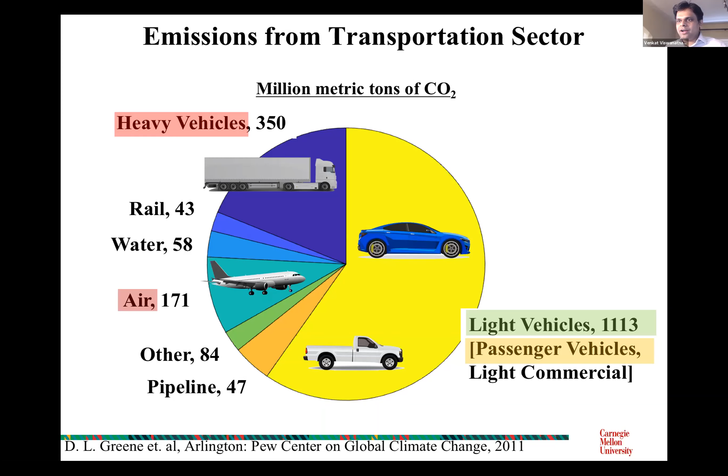Now, while the success of Harbour Air and other smaller planes are significant, if you look at the fuel consumption — and we'll hear more about these kinds of things from our panelists — the important pie to attack is single aisle and twin aisle. So those would be the kind of aircraft that you would fly for distances on the order of a few thousand kilometers.

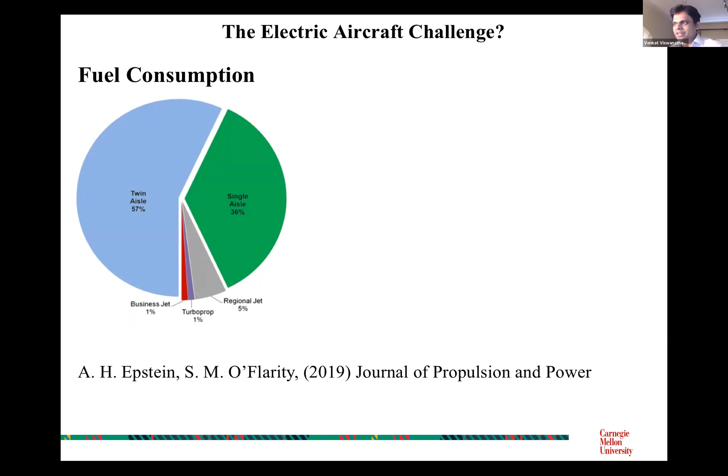Now, if you ask the question, what would it take to electrify something like a single aisle aircraft with whatever is your energy source — batteries or other kinds of electrical power sources such as fuel cells — you can analyze that as a function of the aircraft range, and you see something quite interesting. This is borrowed from a paper by Alan Epstein.

And what you see is, depending on the kind of specific power you can deliver out of your battery packs or other kinds of power sources, what's marked here is the needed specific energy or energy density — how much energy you can store per weight of your power source — versus the aircraft range. And what you see is numbers on the order of a few thousand, right? Maybe somewhere between 1 and 5,000, and you can compare that to the state of the art.

This would be TRL-9, so these would be the kind of batteries that would power your electric cars. They're not even on the chart, right? And so that's an important message, right? That the kind of energy sources we have are not adequate to address one approach, at least the direct approach of electrifying aviation directly through batteries or other kinds of electrical power sources.

Fuel cells also suffer from the fact that they may be able to meet the energy density requirement, but the specific power remains challenging, right? The best state-of-the-art fuel cells in the Toyota Mirai still are well below this 3 kilowatt per kilogram mark. So there's a specific power challenge. Now, this is on the sort of old aviation market, I would say.

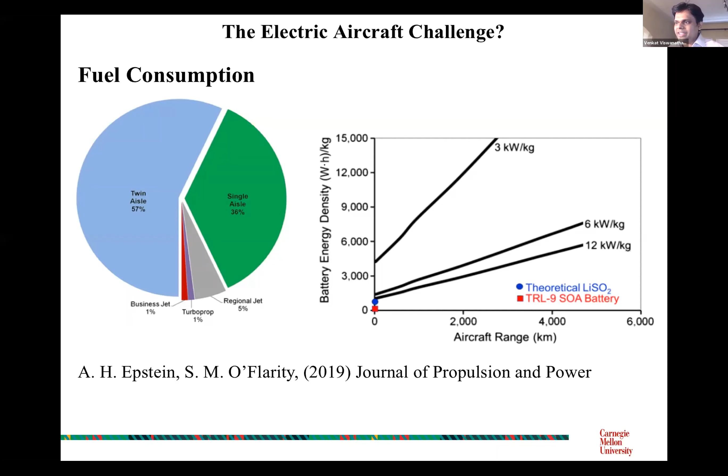And if you look ahead, right, this is an artist rendering from an Uber Elevate Summit where they show a concept around urban air mobility. And these are so-called skyports, which would essentially have these kinds of vertical takeoff and landing aircraft that would come in and take you probably from the top of your building to where you would want to go, right? So the promise is that I could go from the top of my house in Pittsburgh to the Pittsburgh airport in like 10 minutes.

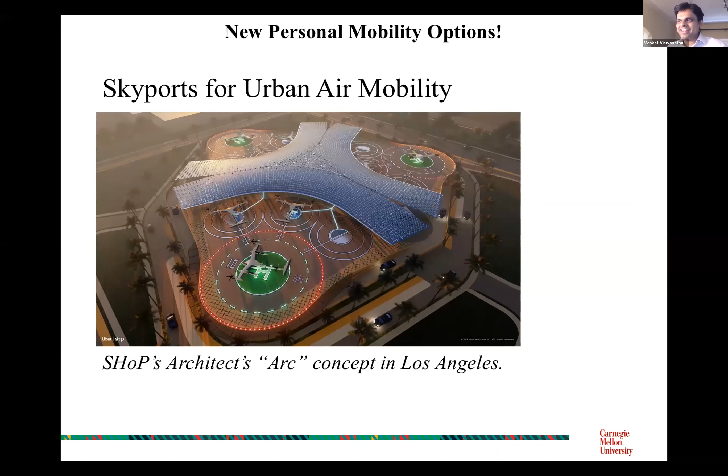And so it's very exciting, and depending on who you ask, there are at least 170 electric aviation concepts in this vertical takeoff and landing space. And the Vertical Flight Society pegs this at $1 billion of investment. And I think it's important, and we'll hear from some of the panelists who are working on this, on whether this hype is worth it or not, or what's the reality.

So I'm very excited now to turn this over to our panelists and get their perspectives. We have a very exciting group of panelists from a broad range of experience from government, academia, and industry. And so I'm very excited first to turn over to Rodger Dyson, and hopefully you can share the screen as I introduce you. I will do that. Can you hear me? Yep. Okay, excellent. So Rodger is at NASA Glenn Research, and he's been there for over 30 years, and he currently serves as the hybrid gas electric propulsion technical lead. And he's going to tell us first a little bit about the challenges around electrifying aviation.

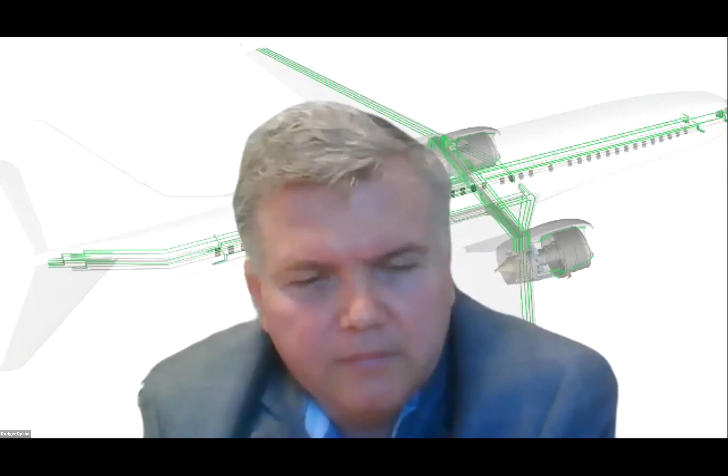All right. Can you see that? Oops. All right. Can you see the screen? Not yet. Not yet. All right, there we go. Got it? Okay, excellent. Let me make that bigger. Sorry for the technical things. One of the interesting things about all these remote tools, we're probably using like 4 or 5 new tools that we normally don't use in our normal work days. So sorry about that. All right, well, thank you very much.

I guess we're gonna do this in 2 sections. So I'll give an introduction to the areas of electric propulsion as it relates to decarbonizing aviation. NASA's focus is actually tackling electric propulsion at these larger aircraft sizes, as you had mentioned earlier, because that's the largest user of fuel. Overall, I don't think the previous slide showed this, but about 3% of the CO2 produced is from the aviation industry currently. So yeah, we're working actually the on-demand mobility market.

There's a group that's working that. We have a group that's working the regional market, and then we have the single aisle as well. The single aisle work we've been doing for maybe 10 years or longer now, working our way up at least since 2008, some SUGAR studies as they're called. But the idea at the single aisle level is that's where you can have the highest impact on the fuel burn and therefore emission reductions.

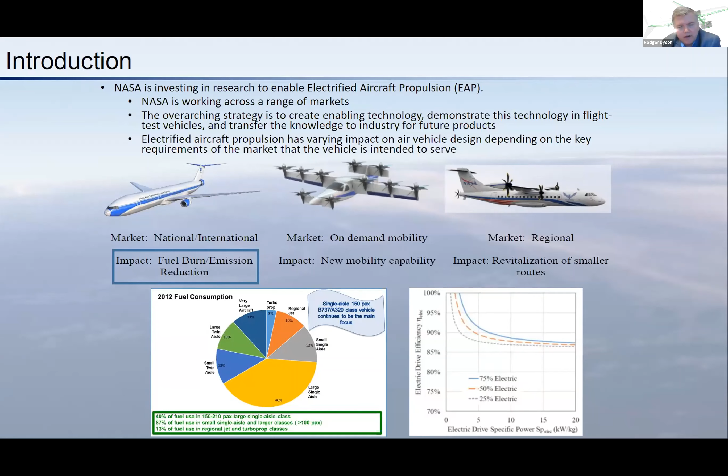And when you look at the schedule for this, and when we're planning out what we're going to do over the next 20 or 30 years, we want to invest appropriately at the different levels. So the way it's going to work out, we believe, is urban air mobility, the smaller aircraft. NASA has the X-57 aircraft that's going to be flying soon. That's going to give you a base of technology that you can certify, get some endurance tests done with it, confirm it operates at altitude, things like that.

And then we're planning maybe by the 2035 range that you'd have single aisle aircraft which use the megawatt scale technology, and estimates are anywhere from 5 to 10% fuel savings. And then beyond that, a radical redesign of the aircraft to support liquid hydrogen, for example, with a cryogenic aircraft.

And then just real quickly, there's 100 years of electric aircraft work actually, but same thing with the automobile market. If you go to the Henry Ford Museum in Michigan, you can see the same phenomenon that happened. Electric's great, but you need all the other technologies to support it, the energy storage, the efficiency, the mass, and so forth. So there was a good 100 years there where not a whole lot happened. And then since the year 2000 and on, there's been a lot of interest, predominantly because the power electronics technology has so radically improved, and we can now consider doing some of these things.

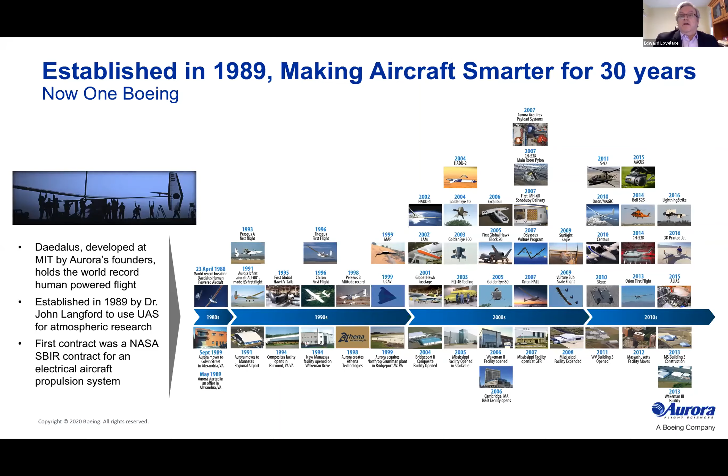So just talking again about the future markets that are part of this panel, which is looking at decarbonized solutions. Here you're looking at the Boeing Next portfolio. Boeing Next was created by Boeing in order to develop some of these future disruptive mobility markets and look at new ways of moving through the air. And you can see a portfolio of platforms that we are in development and study on. The key underpinning element is that all of these developments are centered around safe and sustainable future mobility solutions.

And that goes from the small data and insight type of platforms to cargo platforms to passenger platforms. To be clear, this also spans a full range of target segments, from the short-range urban applications to regional and eventually to global applications. What you'll see in the second half when I go through some more of the challenges, I'm going to focus primarily on the urban air mobility, so the short-range metro city type of applications.

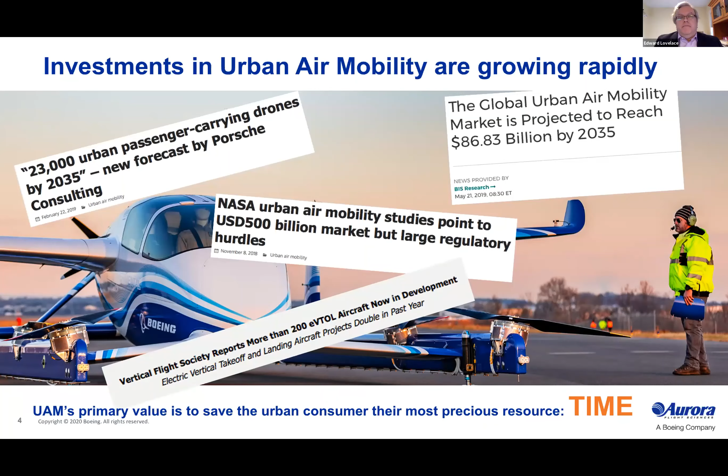So it was mentioned briefly that urban air mobility is a rapidly growing area, and for sure, there's an accelerating amount of activity in terms of startups that are involved in this area, as well as investments being made. And you're seeing a wide range of projections on eventually how large this market might get, into the hundreds of billions. But in addition to the basic needs for urban air mobility to be safe and clean, the other underpinning item that is needed for this to take off is it needs to save a consumer time. That's the main value that it has in this type of urban setting.

Being able to connect new locations that haven't previously been served by traditional air transport, and doing it at a rate that saves them time. So as large urban centers grow over the coming decades, today you're already in some centers spending more than 90 minutes moving from home to where your location is going to be for the day. That's only going to get worse. And so urban air mobility is an opportunity to be part of a multimodal system that'll save people time. So I'll stop here at this point, and then we'll go into some of the challenges in the second half.

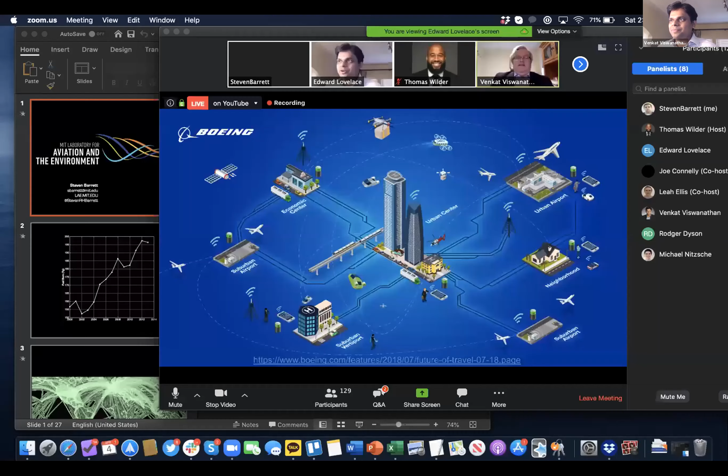So I'll just start by noting that aviation is the fastest growing mode of transportation. So even before we start thinking about urban air mobility and other services in the future, already this is a massively growing industry, obviously putting aside the current issues the world faces right now. And to give you a sense of that, I'll show you a chart of data made at MIT, which shows fuel burn from civil aviation for the first 15 years of this century. And you can see here the tremendous rate of growth, which is at some 4 to 5% per year.

Now, for comparison, the average efficiency improvements for commercial aviation is around 1 or 2% per year. So that tells you that the growth in aviation is far outstripping by a factor of several the increase in efficiency. Now, in terms of where those emissions occur, they currently occur mostly over the US and over Europe. But that's not necessarily where a lot of the growth in the world will be going forwards.

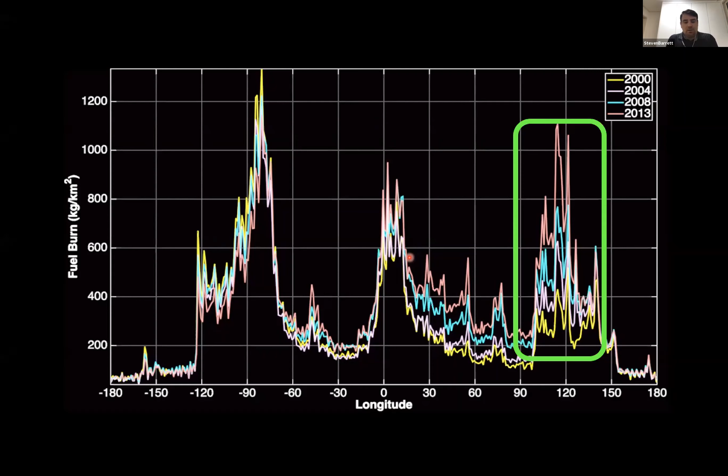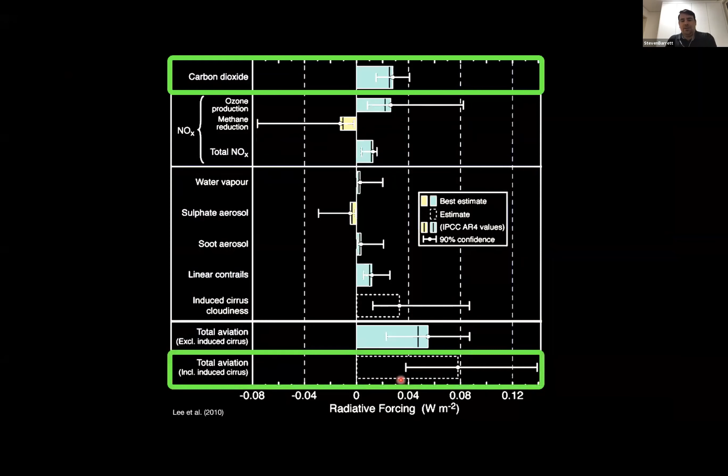Now, what I'll show you next is a chart that shows the warming or radiative forcing from aviation caused by the different emissions from the sector. This is the chart here. Radiative forcing at the bottom here is the measure of warming, and at the top there's carbon dioxide. Now, carbon dioxide gives you a certain amount of warming that is about 3% of warming for the whole world today. But if you look at the total here, you can see that that total is about double CO2 alone.

In other words, there's a whole range of effects unique to aviation that occur because the emissions happen high up in the atmosphere that mean that aviation has roughly a factor of 2 uplift on the climate impact compared to the equivalent emissions at ground level.

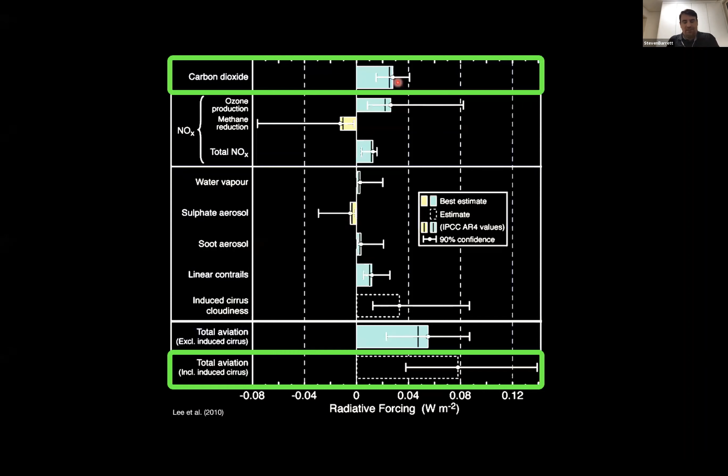So all these factors mean that aviation faces a real challenge because it's very difficult to come up with an energy substitute for jet fuel. And then you've got this multiplier and you've got tremendous growth. And once you build an airplane that lasts for 30 years, and building and certifying airplanes takes a very long time. So all of these things mean we're really facing a huge challenge as an industry here.

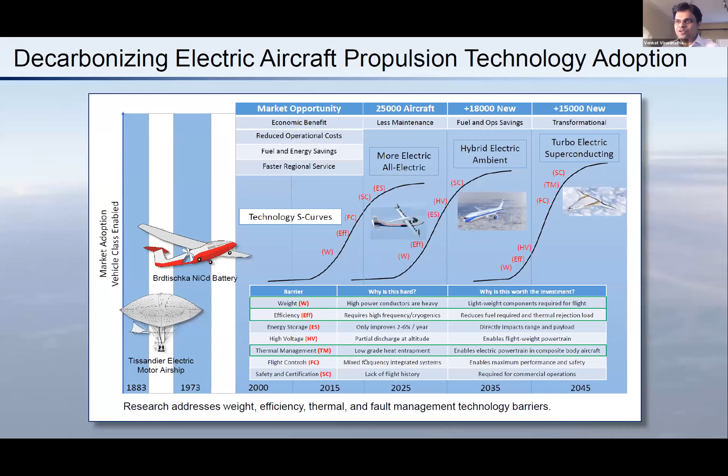Thanks a lot, Steven, for setting the context. So I want to go back to Rodger and ask him to take us through the many challenges that face electric aviation, and I think we can view all the challenges as opportunities for things that we should all be thinking about and working on. So Rodger, on to you for taking us through the challenges.

Well, thank you. I'm actually already learning interesting things from the panel myself, so hopefully everyone else is too.

So now I'm going to talk about how we're tackling, in particular, the megawatt scale type technologies that are required if we're going to replace or reduce the fuel that's used on the single aisle aircraft. And as indicated earlier, the bulk of the fuel that is used in aviation today is used by those size vehicles. But what we're finding is that it's an integration challenge.

While you're transitioning from one technology to the next technology, and you have to do it in a safe way, that means you typically keep the legacy equipment on board while you're adding new equipment at the same time as backups and things like this. So there's a transition period where it actually is more challenging, and then eventually you can rely on your advanced technologies completely. But it boils down to there's a power, propulsion, thermal, and airframe integration challenge.

And they're all interrelated. Today single-aisle aircraft have been optimized over many decades because they're so widely used. So to improve them further is a real challenge. It's not an easy win. You might benefit one part of the system, but it costs you someplace else. And when you're talking about maybe net benefits of 5 to 10%, with all of these systems playing nicely together, it's easy to not see that net benefit if all of your technology doesn't perform as you're hoping.

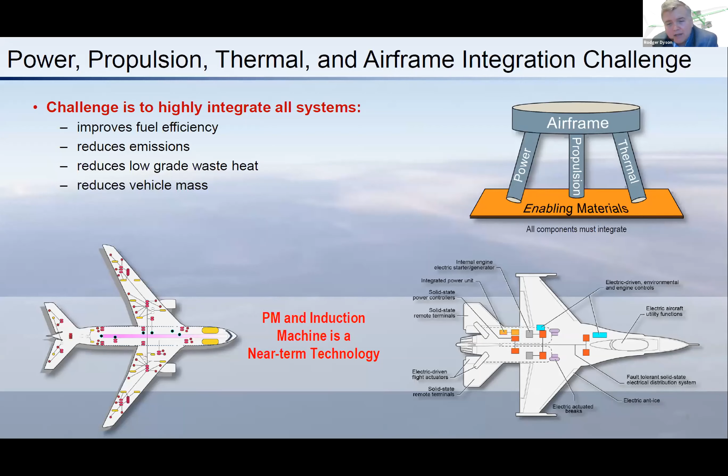There's going to be a number of flight demonstrations you're going to be hearing about. I don't think all the companies have announced them yet, but in terms of motor technology, people are using permanent magnet machines, a near-term technology most are using for flight because it's lightweight. I have the airframe mnemonic on the side there showing that power, propulsion, and thermal all integrate together at the airframe.

So talking about integrating the electric motors, there's a couple of ways to do it. Industry right now, I'm talking about the large 150 passenger scale aircraft, single aisle, is going towards parallel hybrid, because that involves the least change to the airframe. Change is not your friend when it comes to these large aircraft and getting them certified. One crash and it changes your whole perspective. So they're very conservative, and by embedding electric machines with the turbofan, you can get 3 to 5% emission and fuel savings, which maybe doesn't sound like a lot, but because usage rates are so huge and these systems are already so optimized, getting 3 or 5% is worth a lot - billions of dollars and many gallons of fuel saved.

So there's two ways to do it. Parallel hybrid, which is short term, you'll be hearing more about that - that's where you put an electric motor on the same shaft that's spinning a fan, and you still have jet fuel powering it, but you can reduce the size of the engine, with other benefits too. Then longer term, once we're comfortable with decarbonizing aviation at this scale with these changes that the customer won't even see, we believe turbo-electric type technologies, where you can make slight changes to the airframe like boundary layer ingestion, can boost you another 5 or 10% in fuel savings. So these are the two areas we're working in, combining electric machines with current technology.

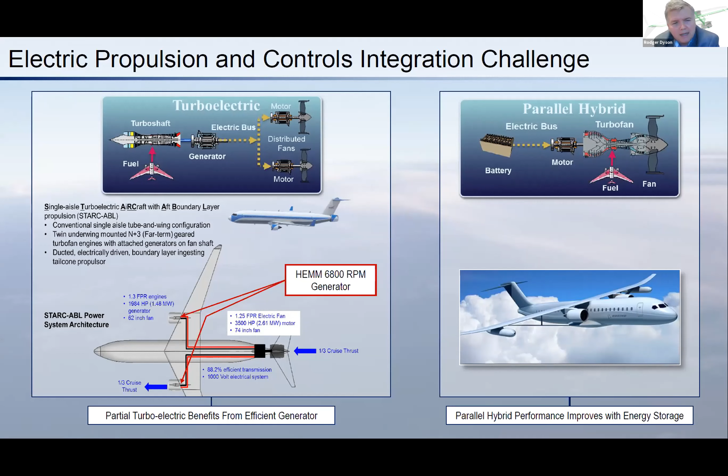The other new area, safety and certification, is a really big deal, especially when we start talking about a whole new set of technologies operating at voltages. Today aircraft are designed for 270 volts and below because of Paschen's curve. Now we're talking about 1,000 volts and higher to make them lightweight enough. It turns out that if you use all that power at high voltage at altitude, it's like an arc welder - in a millisecond you could arc weld through the frame of the aircraft if you're not careful. Today's technology can respond to a fault in about 500 microseconds to 1 millisecond, enough to protect the airframe and people, but not the equipment. The equipment, like all these IGBTs flying at altitude, can only be run at saturation for about 10 microseconds. So that's what we're doing next: developing a new class of fault management hardware that can respond much quicker than today, at those higher voltages and currents.

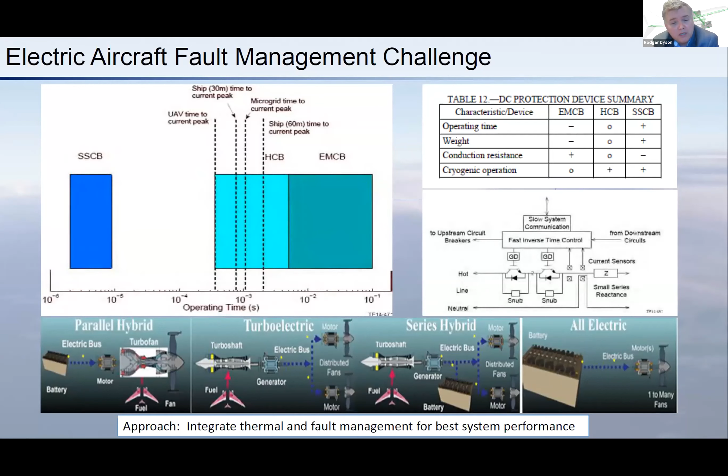Thermal management is another challenge I alluded to earlier. People are looking at what to do with all this heat being generated on the aircraft now. Maybe your aircraft is more fuel efficient, but now you have more distributed heat sources located throughout the aircraft. It used to be we would just dump all the heat either with ram air or out the end of the nozzle of the turbofan - that's where your heat went. But now we have a lot more heat, and low temperature heat is the worst kind because it's very difficult to get rid of.

So where do you dump it? Fuel on these aircraft are limited to about 50 kilowatts. If you dump it out to the skin, which requires changing the aircraft design, you're limited to about 300 kilowatts.

If you use ram air, which they do now on the Boeing 737, for example, or bypass air, which is the propulsive air from the turbofan, then you have drag penalties. In particular, we have to design for worst case, so like a 1% hot day. You have a 3 to 5% drag penalty trying to manage the heat. So you might develop all these other technologies, and then you find out, okay, now we have to manage the heat. Well, we just lost the benefit that we got from putting all these really slick new technologies on the aircraft. So that's what I mean.

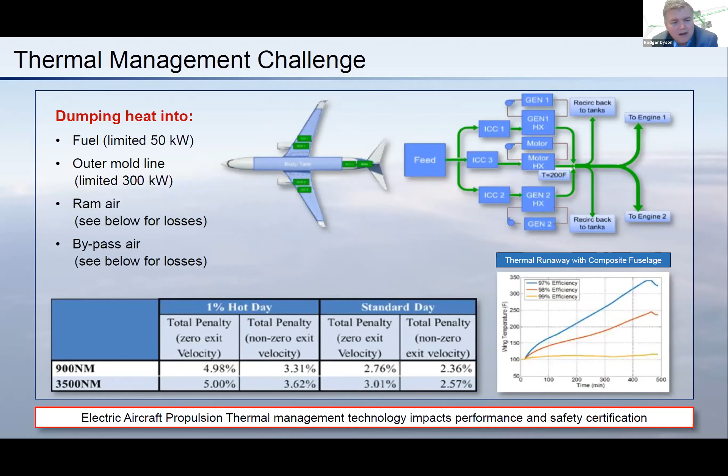It's a systems problem. Energy storage, some other speakers might talk more about this. It's just not an option for single aisle aircraft to have it all electric aircraft. The battery size would be bigger than the aircraft itself, even with the next 10, 20 years of technology improvement.

In fact, we're assuming you need about 500 watt hours per kilogram specific energy density for batteries, just for the parallel hybrid to really close in a good way. And we're banking on that as well. So these hybrid solutions are really a compromise because we don't have the battery technology where we want it to be.

So when we use that word hybrid, what does that mean? That means we're keeping really all of our other technology, and we're adding new technology onto the vehicle as a compromise, which makes for very complex systems, more complex than they are today. So again, it's not easy to get fuel savings on these large aircraft, and we're making the problem more complicated because of all the new technologies. Eventually, it should all get simplified again, but that's where we're at today.

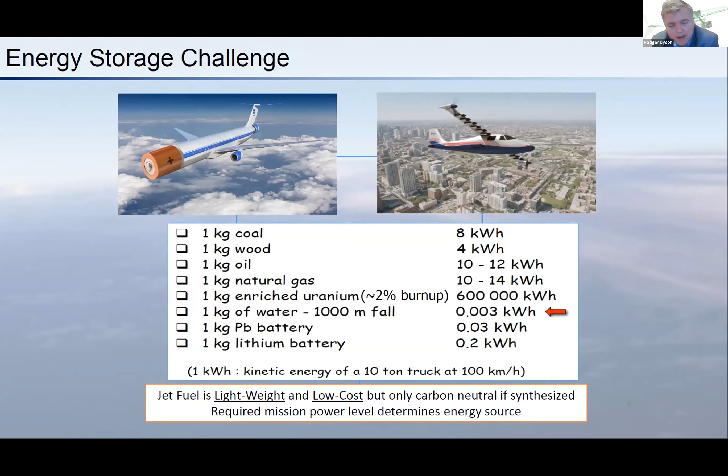Oh, and I should just mention that jet fuel is 40 times, 50 times lighter than a battery for the same energy storage. But Department of Energy, ARPA-E, are looking at synthetic fuels, carbon neutral fuels. So that might be another path. And I think one of the other panelists might talk more about that.

And then I talked about materials kind of being a technology that can elevate everything else up. And so we are working superconducting materials. Main challenge there, and keep in mind, we're trying to make things very efficient and very lightweight because we're adding additional, it's just like adding additional cargo to the aircraft. Ideally, we'd have 100% efficiency and no additional weight. That's what you'd like to see, but that's not the case.

So we're adding technologies, and we want to minimize the efficiency impact and minimize the mass impact, which on its own would actually make the vehicle less efficient and make it weigh more. But the reason for electric aircraft and what it buys you are other approaches that you can get. It's usually airframe related improvements, or you're improving the engine efficiency by increasing the bypass ratio. I know I'm throwing a lot of concepts all at once, but the superconducting materials allows you to make electric machines and distribution systems that are much lighter potentially.

But the problem is that AC is not managed well. So DC current's fine, but AC is not. So that's one area we're working, is how do you make AC still be close to superconducting performance.

Insulation materials, we have all this new heat sources. Normally insulation materials also hold in heat. Well, we need insulation that can handle high voltage and conduct heat at the same time. Magnetic materials. It turns out that if you're going to be building filters and other electrical parts and pieces, you like to go to higher frequencies because that reduces the mass. Typically, you end up with hysteresis losses and other losses that reduces the efficiency. So we're developing new materials that can handle higher frequencies.

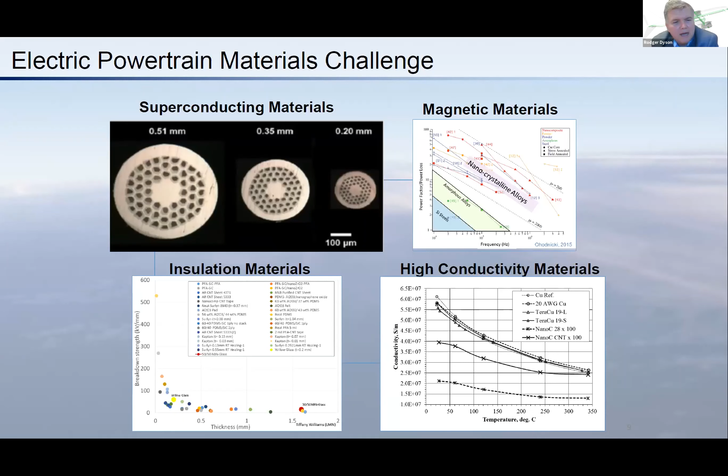And then also just, not even at superconducting, but just ambient temperature conductivity of materials. The higher conductivity we can get, the lower the mass can be. And then, so you have all of these different technologies, and at the megawatt scale, testing them is a challenge. So we put together an electric aircraft test bed back in 2015, and it's actually been helping industry quite a bit at this point, because we need to test at megawatt scales and all of the system interactions.

So for example, I give a list down there, and all of this has to be tested at altitude, so 35,000 feet, because different things happen at altitude. So for example, voltage, as you go higher up in altitude, you tend to get partial discharge.

Thermal management systems are affected because you have thinner air, the heat transfer coefficient changes, and so forth. Everything has an altitude-related response, so you want to test it at altitude. But you also want to test high voltage bus architectures, high power megawatt motors and inverters. You also want to be sure that your communication systems can still work properly, because now we have all these high power systems next to your communication systems. You still want to try to meet the standards that are out there, the DO-160G and other standards.

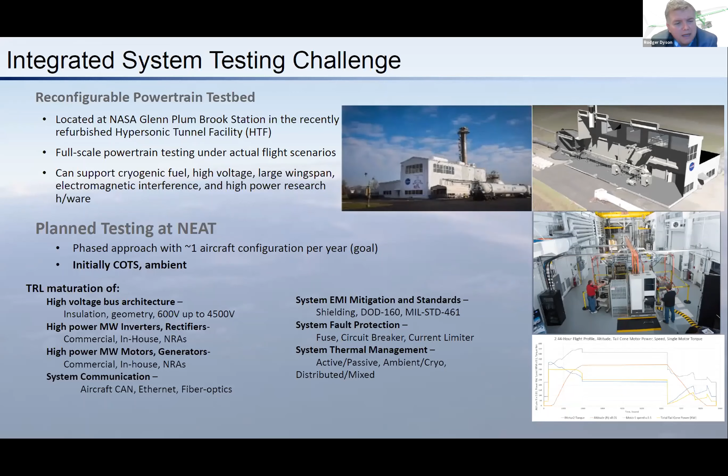And I mentioned earlier the fault protection. We need faster fault protection, and then system thermal management. So we have an altitude chamber that's about 25 feet in diameter and 20 feet high, megawatt scale, and can handle a megawatt worth of heat.

So just in conclusion, and in the panel discussions I can answer more details on any of these things. But I guess the bottom line is that where we're at today in terms of megawatt scale technologies for single aisle aircraft, we've confirmed that motors and inverters at the megawatt scale can be light enough, can operate at those higher voltages, and the only thing left is confirming their durability. There's very little public information out there about it, because it's a competitive market right now. But we think those are actually addressed, and you're going to be hearing more about those.

The new area that needs development that we're working on right now is the system level technologies for those things—propulsion controls, faster fault management, and integrated thermal management. And again, doing it without adding too much more weight or complexity to the system, and still finding a path to be able to certify all of these technologies. There's multiple government agencies collaborating in all these areas.

But again, the bottom line is large transport aircraft has the biggest impact on CO2 production, so this is where we're tackling it, and it has the highest impact on decarbonization. In addition, there's new mission capability that's possible because of it. Like, for example, taxiing on the ground at airports could be done electrically, and it'd be quieter, and there's other benefits as well. So it's a system thing, but it's also easy to have one part of the system disproportionately affect another part in a way you didn't expect.

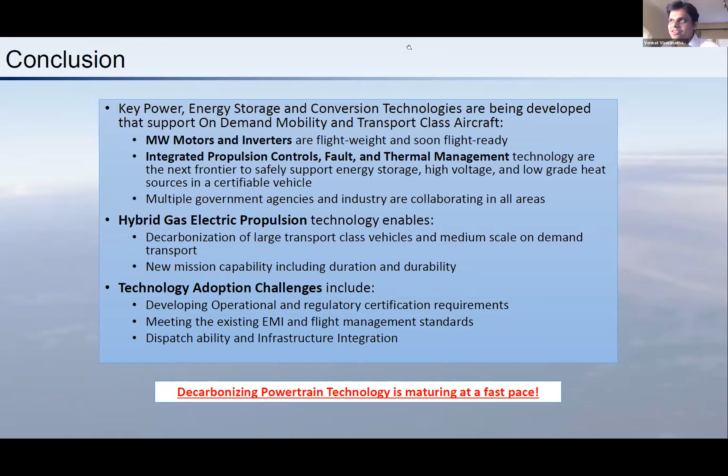Next, I'll transition over back to Stephen, who's going to tell us a little bit about alternate fuels and then another exciting strategy for electric propulsion, which is a little different from what we've been hearing.

Thanks. Yeah, so I thought I'd start by giving a high-level view on what the mitigation approaches are to address aviation, not only CO2, but also the non-CO2 effects I mentioned that gives you roughly a factor of 2. Then I'll move to some of the challenges unique to some of the future applications of drones and urban air mobility. So at least for commercial aviation, mitigation approaches include operational, which means flying planes more efficiently so they burn less fuel. That's something we've got to do, but it might only give you something like 10%, so it's important but not really going to get you to something close to net zero.

Secondly, fuels. So you don't have to just use petroleum-derived kerosene or Jet A or Jet A1 fuel. There are other options.

Third, technology, which is what most of this discussion will be about. And also fourth, economics. So there are approaches where you could price carbon into the aviation system and internalize the environmental impacts that way.

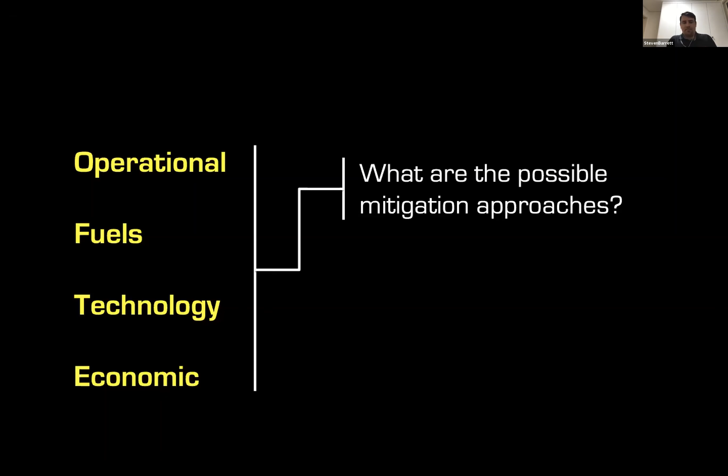But first of all, I want to focus on fuels, and in particular biofuels. The idea behind a biofuel is to use biomass, a crop or plant or tree, to make jet fuel. When you grow biomass through photosynthesis, carbon dioxide is taken out of the atmosphere, and the biomass created is physically carbon and oxygen and other components where the carbon came from the atmosphere. Then you convert that biomass into a fuel with chemical engineering techniques, then burn it, and the carbon atoms in that fuel came from the atmosphere in the recent past.

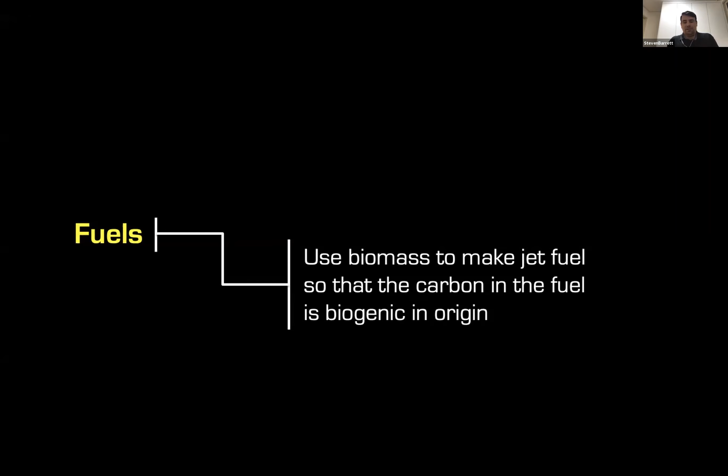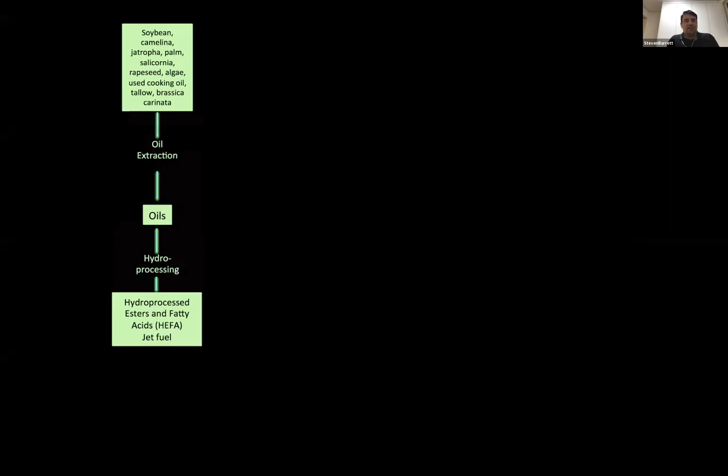So the idea is that the life cycle carbon dioxide emissions of a biofuel are significantly lower than a conventional fuel. There are many ways to do this. You can have a whole range of different feedstock crops, shown in the top left, like soybean, camelina, or jatropha. Then there are techniques such as producing HEFA fuels by mechanical and then chemical engineering approaches, and a whole raft of different feedstocks that can be used to create fuels using techniques including fermentation and Fischer-Tropsch.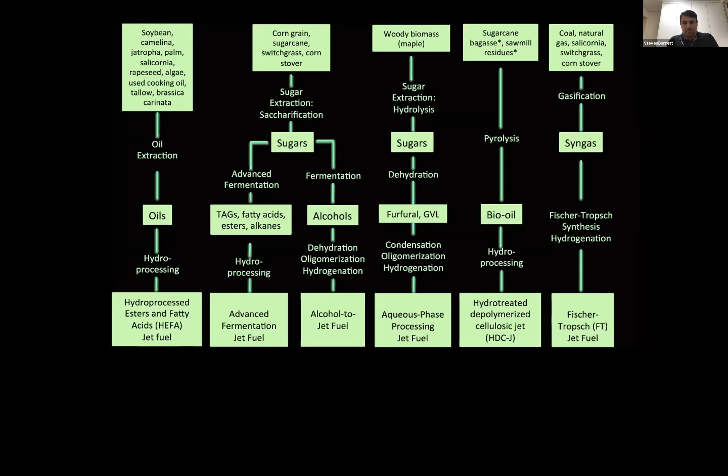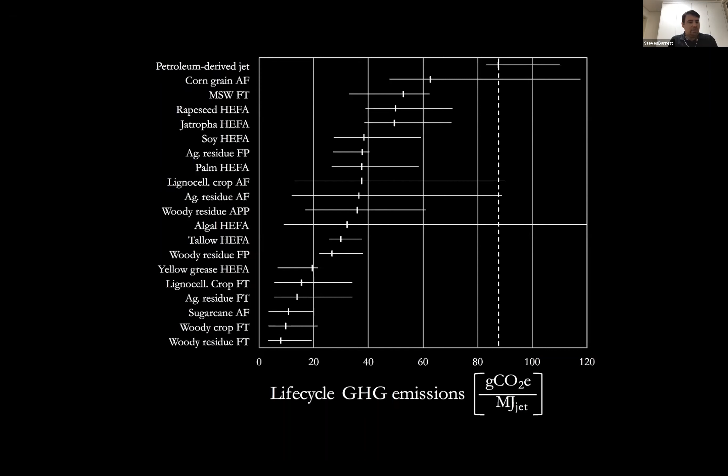So this tells you biofuels really are a viable way to reduce CO2 from aviation, but there are some downsides, including that they cost twice or sometimes several times more than conventional fuels, and can in some cases compete for land with food crops and raise other land use change issues. But they're potentially an important part of the mix as we seek to solve this problem.

So let's go on to technology. On the technology front, there are a number of approaches; I'll highlight a couple here. The most common approach is to think about decreasing the fuel burn of the vehicle, which is probably the most important single thing to do. That's really about creating a vehicle that uses less energy.

Beyond conventional fuel, or even a biofuel that's chemically very close to conventional fuel, you could go for a very different kind of energy carrier, for example a cryogenic fuel like liquefied natural gas or hydrogen. Those have benefits and disadvantages we can discuss in the panel session afterwards. And of course, fully battery electric aircraft could be a solution, particularly for very short haul and urban air mobility, where they look more viable based on where we see battery technology going.

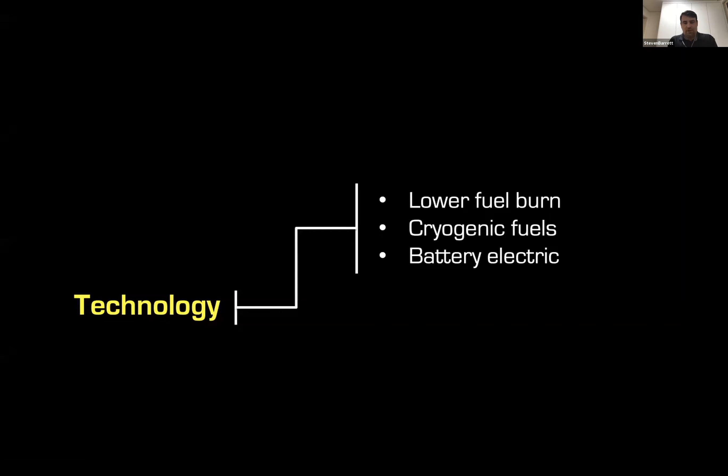But on lower fuel burn, colleagues in MIT's Aeronautics and Astronautics Department, in collaboration with Pratt & Whitney and Aurora, a few years ago designed this aircraft called the D8, or double bubble. In the more extreme technological assumption scenarios for this aircraft, it could yield up to a 70% reduction in fuel burn using approaches including boundary layer ingestion. That really does move the needle toward net climate neutral. If you had an aircraft like this combined with biofuels, those two things together could really get you a long way toward a climate neutral aviation sector.

But what I thought I might change to now is to look at a different application from commercial aviation and think about drones.

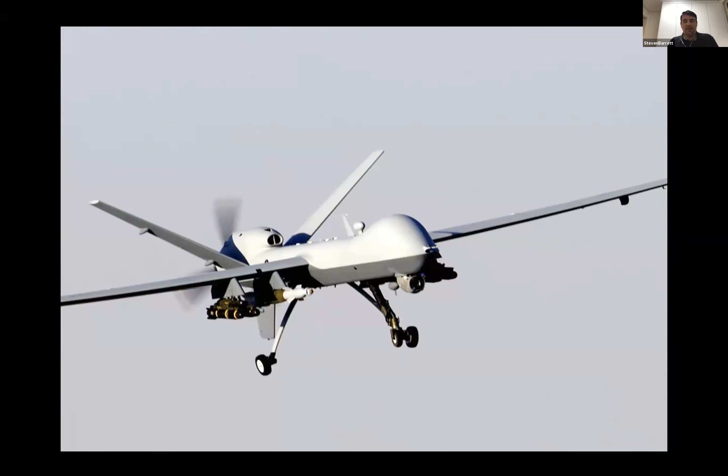Now, drones, which are kind of similar in size and range in some ways to urban air mobility, have been around for a long time. This is an example of a military aircraft that's been flying for some 20 years. There are also other applications more recently, like this blood delivery drone used in Africa at the moment, and perhaps in the future things like Amazon Prime Air and urban air mobility at a slightly larger scale.

Now, while at a global scale we worry a lot about carbon dioxide and energy use, when we get to the more local scale, we have pollution emissions that we're concerned about, energy use still, but also noise. So in order to enable local scale aviation, meaning both package delivery and other services, as well as potentially air mobility, we need to solve those challenges. Now, all of these things have rotating propellers that create a lot of noise.

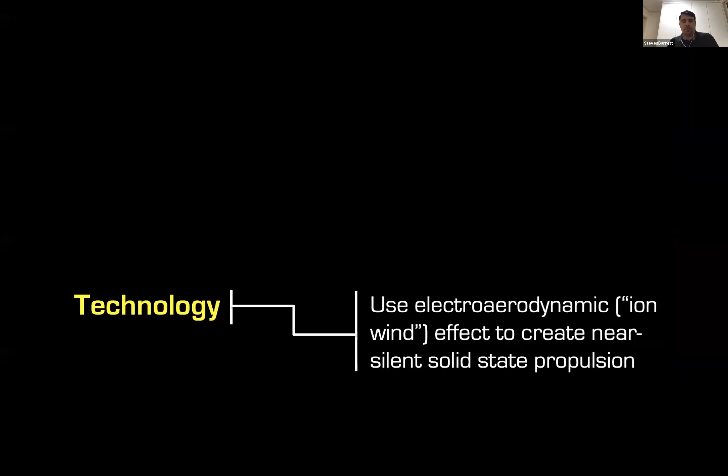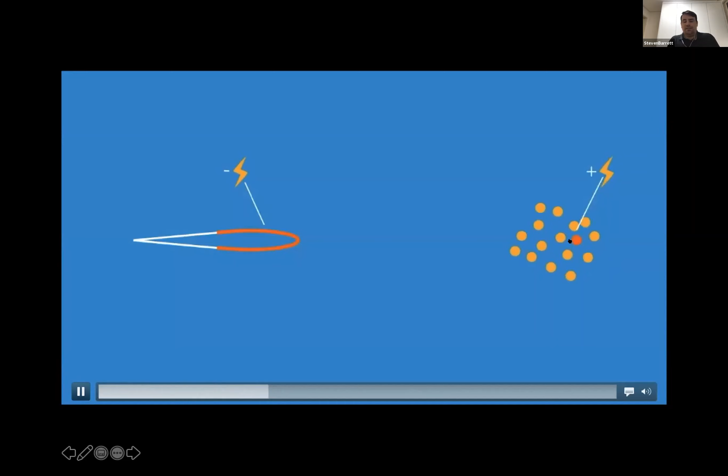When you charge that, it ionizes nitrogen molecules around the high voltage electrode, and then there's an electric field going from the high voltage to the low voltage that attracts the ions towards the low voltage. Those collide with neutral air molecules, transferring momentum to them, creating a wind or an ionic wind in the air, and that's the mechanism for producing a propulsive force.

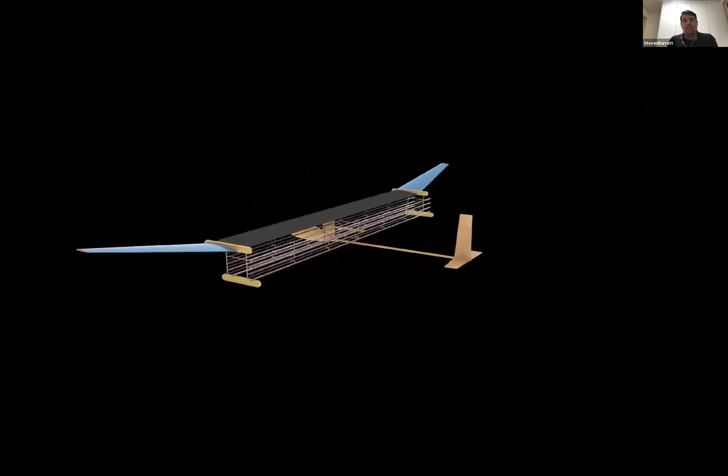So over the last about 9 years, we've done a series of experiments at MIT to build up the scientific knowledge base on how these kinds of ionic winds, as they're called, are generated and how efficient they are, and eventually designed a small 5-meter wingspan airplane shown here, which, if you zoom in under the wing, has an array of these solid state propulsion systems with emitting surfaces that emit ions that then get collected on these airfoils.

This was flown for the first time just over a year ago in the MIT gymnasium. So that was the first solid state flight of an airplane with no moving parts. It only flew 60 meters and for 10 seconds, but we've got to start somewhere with these things. And just to prove that wasn't just a launcher, this is how it looks when you don't have a powered flight. Taking those 10 test flights together, we've got a chart here of altitude versus distance for the powered flights versus unpowered flights. And it does show that we did manage to sustain a steady level flight for this solid state propulsion aircraft.

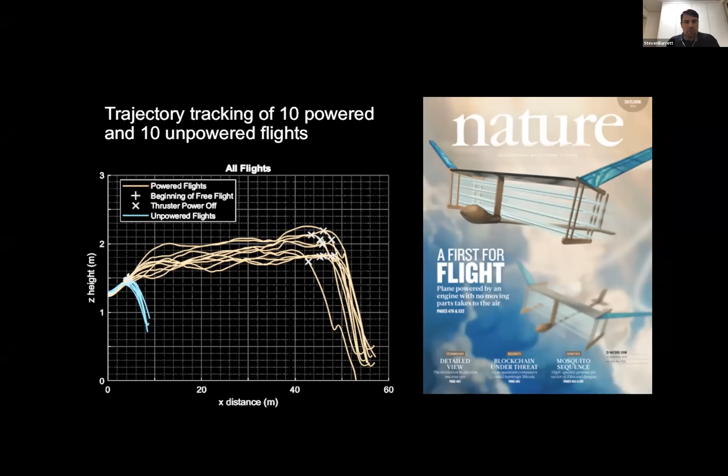Now, going forward, we're working towards newer designs and are working to design an outdoor plane that will fly for some 30 minutes with a small payload. And this is a long way from being useful for package delivery, let alone air mobility. But there is at least some potential here for creating a whole new form of propulsion that could be useful in some special applications. So with that, I'll hand back to Venkat.

Super, thank you so much, Steven. And then finally, we'll close out with Ed again. And I think I'll give Ed the opportunity to rebut the common statement made on the lack of technological progress, right? We wanted flying cars. We got 140 characters, or I guess now 280 characters. So Ed will showcase what his team has been thinking about on building flying cars.

Unmute yourself, Ed. There we go. Do you see my full screen again? Yep. Okay, great. All right, so I'll move on to the next chart.

Yeah, so this dovetails a bit with Rodger's list of some of the challenges, and they come in a few buckets, just as Rodger also said. There are some technological limitations that are currently today limiting us in terms of payload and range. One of the things that is obvious to those in the aviation industry, but maybe not to everyone, of course, is with these liquid fuel traditional aircraft, the fuel weight goes down as you move forward in flight.

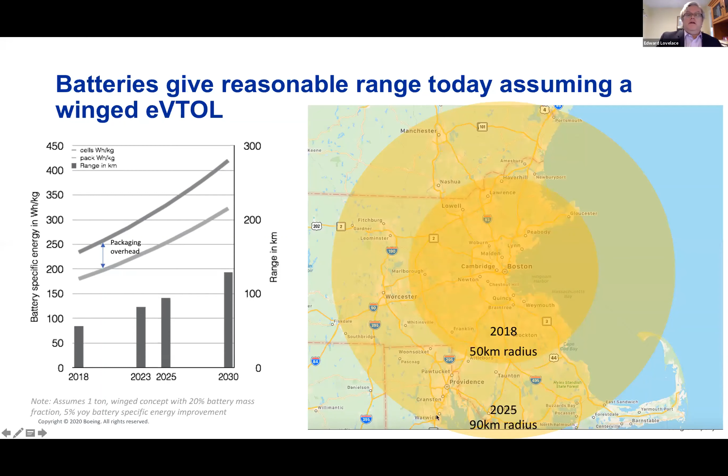And I'll just touch on one other theme, which is really coupled to the battery system. Obviously, there's a coupled thermal challenge, which Rodger talked about, and in the urban air mobility sector, as I mentioned a little bit earlier, as you get to the end of that mission profile, you have a peak power event during the transition and landing event. This also causes a limiting thermal event and thermal management challenge for the urban air mobility vehicle designer.

Obviously, you then have to trade off weight and reliability of different thermal management systems, and you need to think about how it will manage and accommodate single fault conditions in operation. And as Rodger talked about, it only gets worse with scale. So as you start to look at some of these larger aircraft applications, the dimensions of the thermal management issue just become that much larger.

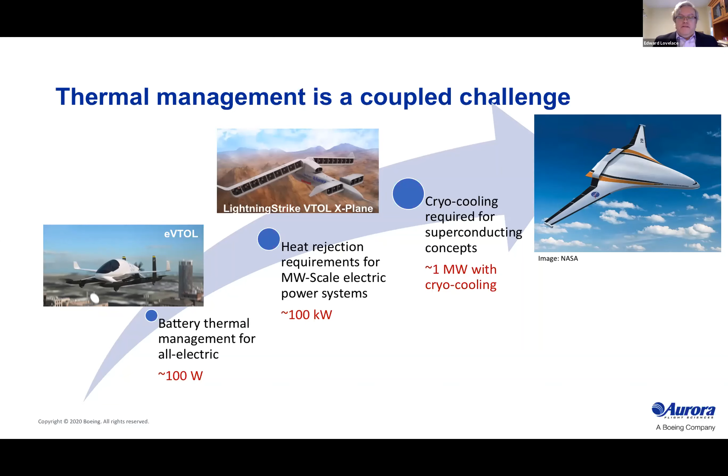And in terms of design paradigms, we typically focus on first reducing the amount of heat that we're producing, and then two, trying to reuse that heat or those losses as much as possible. And those are really the two levers that we have beyond some of the new materials that are being developed, as Rodger also mentioned. So that's really the key item that I wanted to focus people's attention on for this urban air mobility market.

And thanks. I'll turn it back to you, Venkat. And thanks a lot, Ed. Very exciting to see the progress in UAMs.

Okay, so we have a few questions. We want to try and get through as many as possible. One of the things that's probably on many people's minds is we're going to return to hopefully a new normal and what that looks like for aviation. So I'm going to put Ed on the spot and allow him to take a crack at this.

Yeah, so I would probably be quite wealthy if I was able to predict how that is going to be. To be honest, nobody knows. If somebody tells you they know, as I think the first keynote speaker said yesterday, they're not telling you the truth. But I think for sure we are going to see some kind of reshaping of how people travel, whether that's on the ground or in the air.

And that's, of course, one of the high-level aspects that the Boeing Next team is very much focused on, thinking about new ways that people are going to travel and all of the different stakeholder issues that might be driving or pushing that in one way or the other. So all I can say is, believe me, we are thinking about it, but we don't have a crystal ball about how that's going to change.